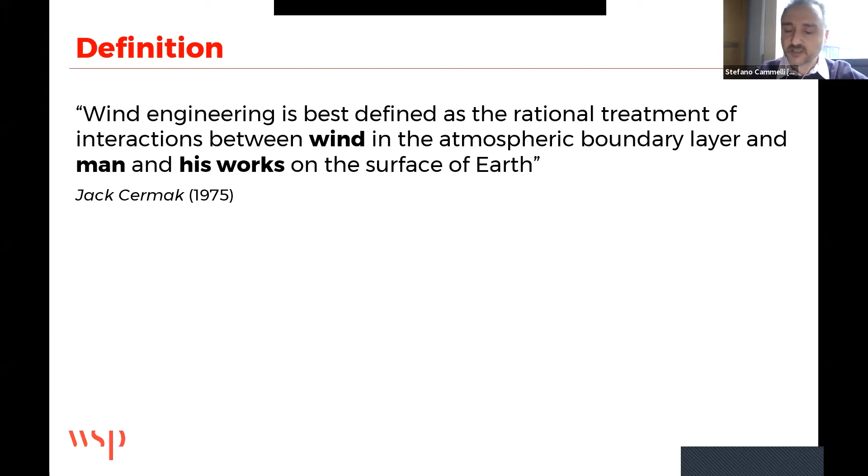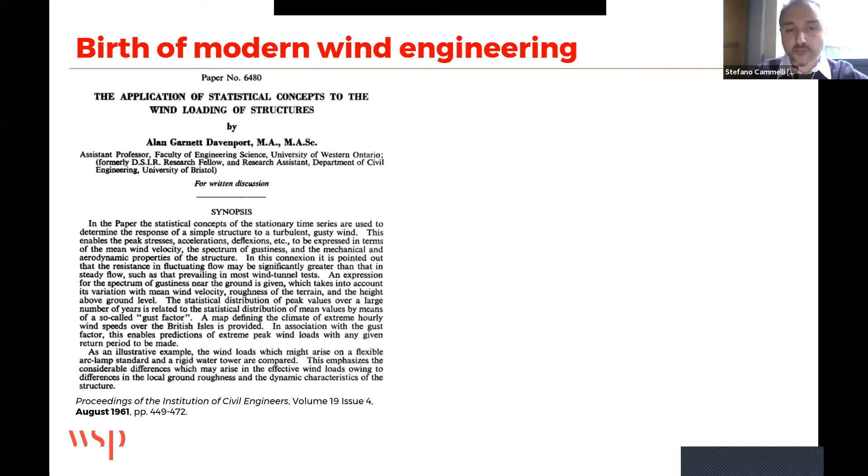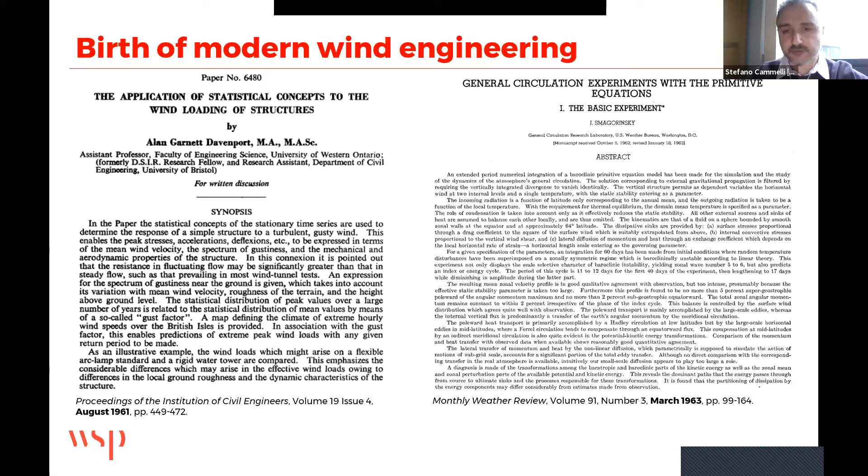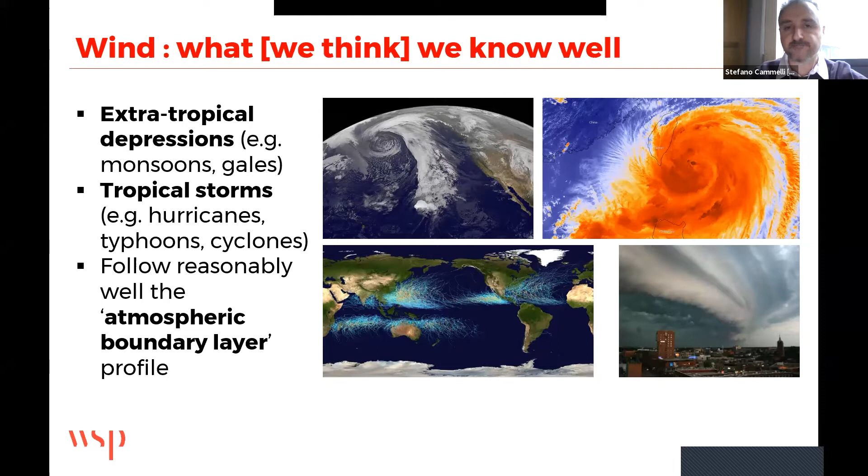Obviously, when you study a new wind climate, or want more understanding of how different mechanisms work together, there's a lot of work needed in developing a detailed wind climate analysis for a specific site.

Different types of mechanism, different types of storms need to be separated. Their probability needs to be treated separately first and then combined back together. And that obviously has an impact on directionality.

As part of the study, parallel wind tunnel testing was commissioned subsequent to the collapse, to gain a more refined understanding of the wind loading on the two structures. Interestingly, the two labs involved ended up with quite large discrepancies in the definition of wind loading overturning moments, for instance—something of the order of 25% apart from each other.

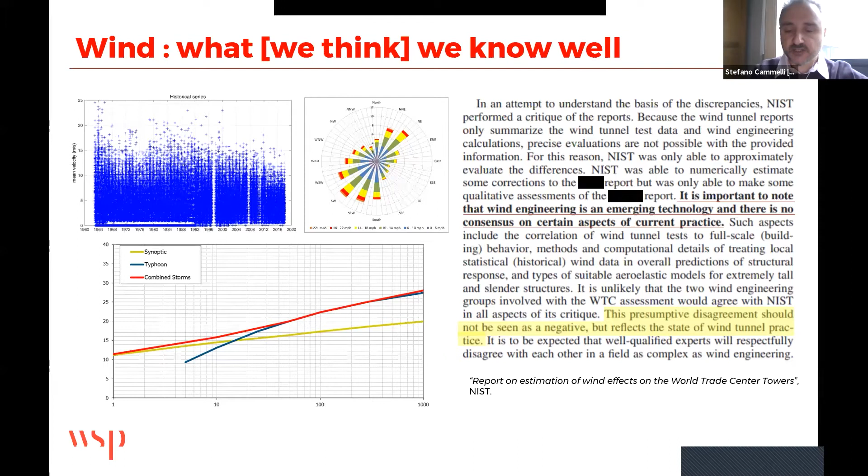If you gather data from weather centers or airports, always be careful to understand where the anemometer was positioned and what type it was—was it a rooftop? Those come with a lot of problems, like proximity effects. Having a good understanding of this is essential.

And if you don't know enough, get as much data from different stations as possible and compare them with each other, because if you intend to rely on this for design purposes, you need to be pretty sure about what you're doing.

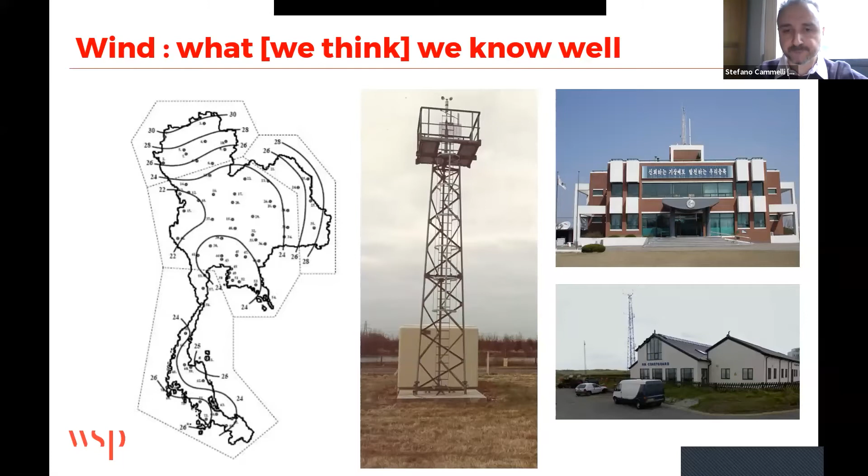Studying the effect of the topography and characteristics of terrain around the site is important. These days this is a little easier because there's a lot of digital information publicly available on land usage. You can use this to characterize the aerodynamic roughness, and then develop an understanding of variation of mean wind speed, intensity of turbulence, length scale, gust speed, you name it, just to get a good understanding of what forces you might expect.

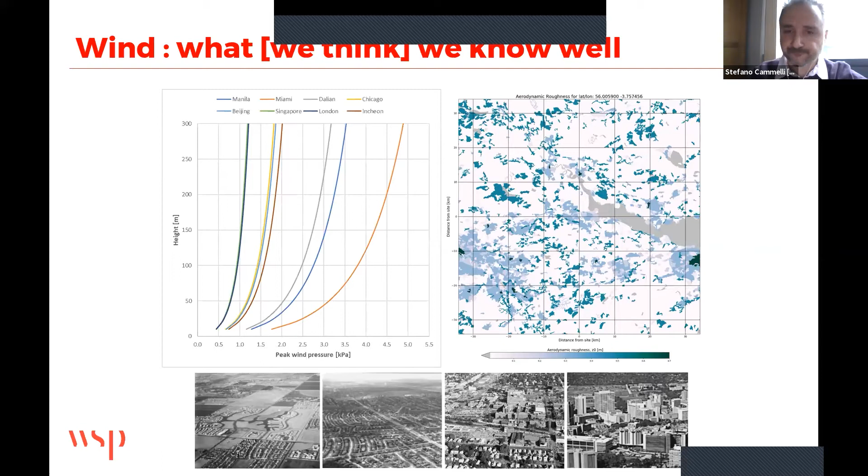As you can see from this slide, if you move between places without hurricanes or typhoons to places with typhoons, you can get a huge increase in pressures, sometimes up to a factor of 4.

It's probably fair to say that the two biggest research centers in the world at the moment in these fields are the ones at the University of Genova in Italy and Western University in Canada.

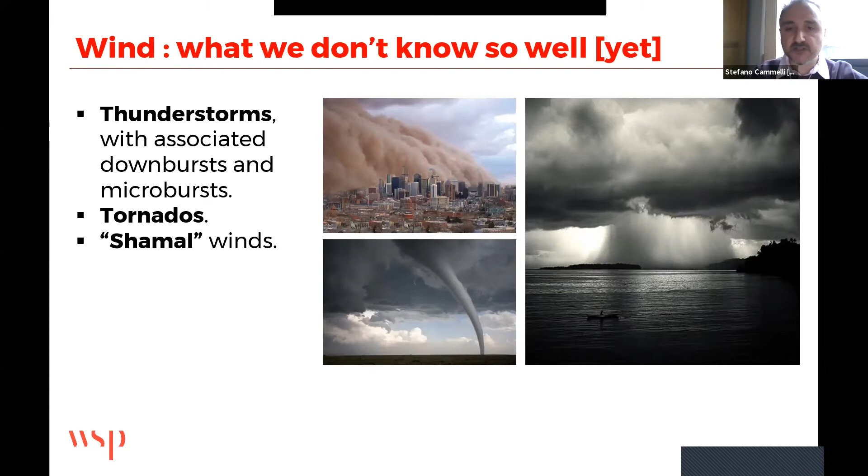As you can see, these events can happen very suddenly. If you couple this with temporary structures, things can become quite tricky, especially if during the design process you started reducing wind speeds to save on material, etc.

The directionality of this event is very difficult to establish. These downbursts can happen at different locations, and therefore the direction the flow is coming from is very much uncertain. This is just because the size of these events is incredibly smaller compared to the size of a large extratropical depression, for instance.

So, forms. Forms is all about architecture—that's our first filter function, if you like. This is quite a nice slide showing the power of three-dimensionality: moving from 2D to 3D forms in the context of aerodynamic force coefficient, in this case drag specifically. As you can see, by promoting three-dimensionality, you can actually gain a lot of reduction in loading.

You might ask yourself, why am I talking about three-dimensionality when we are looking at tall buildings, which are typically tall and slender structures? Well, there are opportunities to promote the dimensionality of the flow, especially by playing and tweaking the top part of the structure, and that is incredibly beneficial in so many ways—I'll come back to this.

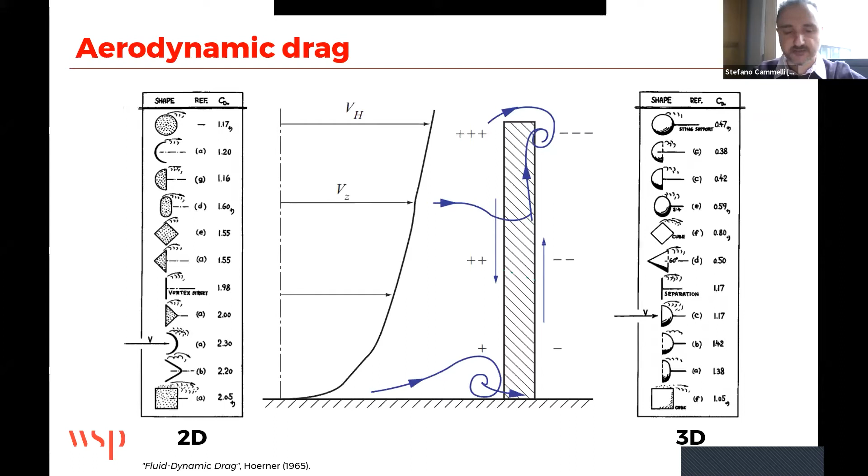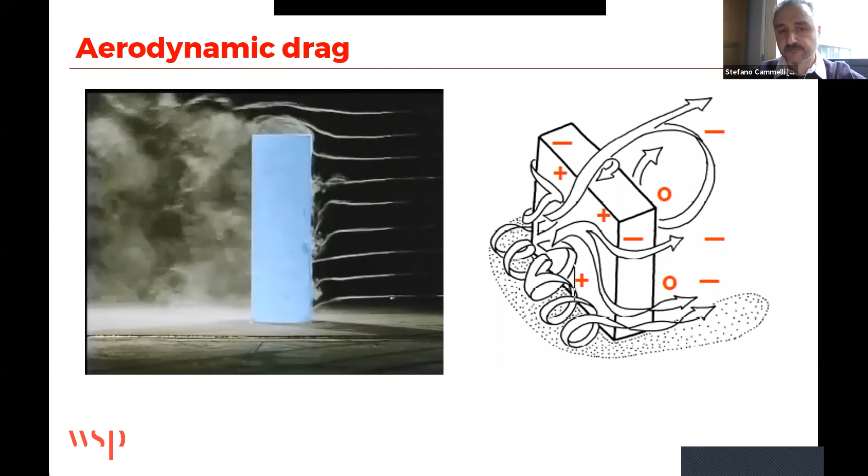But obviously we can't be too obsessed with drag. There are other important factors we need to look at. This slide describes how turbulent flow interacts with prismatic structures. As you can see, the flow—especially at the top third of the building—is generally highly three-dimensional, although, as I said before, this can be enhanced even more.

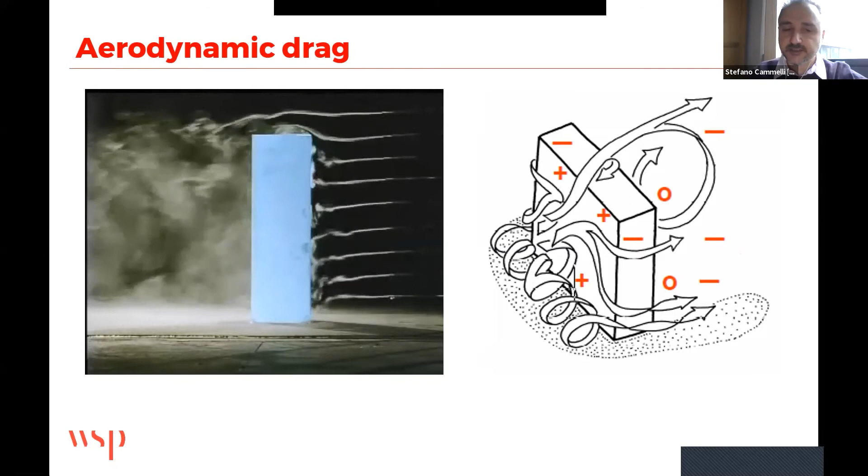Typically what happens from roughly two-thirds of the height down to street level is a downward movement of air, and that's what makes the base around these tall buildings particularly windy. So these are quite challenging things to consider.

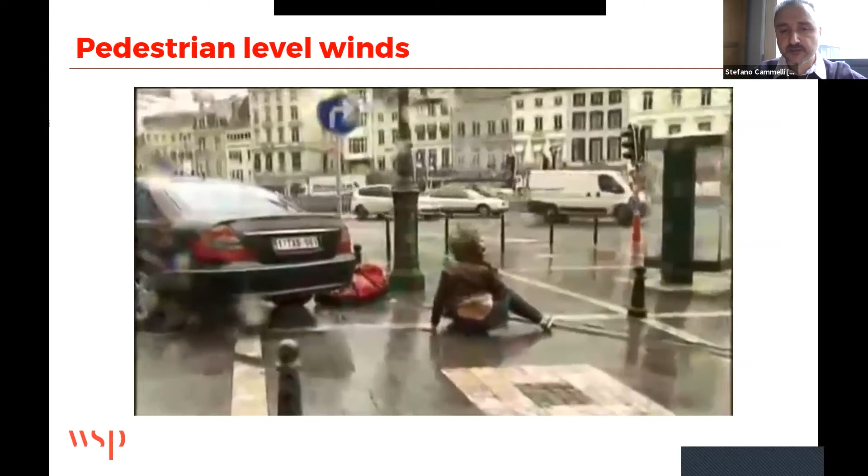Obviously, we are interested in comfort but also safety of pedestrians walking through the cities. There's a tremendous amount of work typically done to make sure that situations like the one shown in this video are very much avoided.

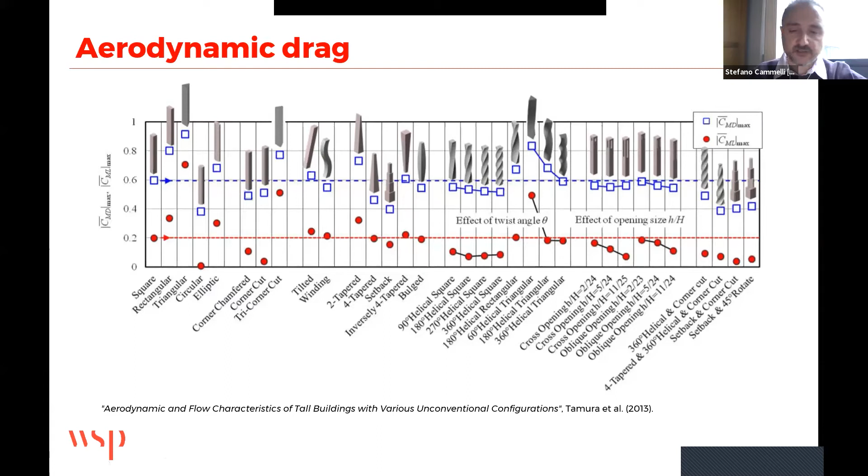This is quite an interesting slide because it shows that corner treatments are quite helpful in reducing the overall drag acting on the structure. What's interesting is that perhaps one of the best performing extrusions is a circular cylinder. Obviously, a circular cylinder comes with other problems attached to it.

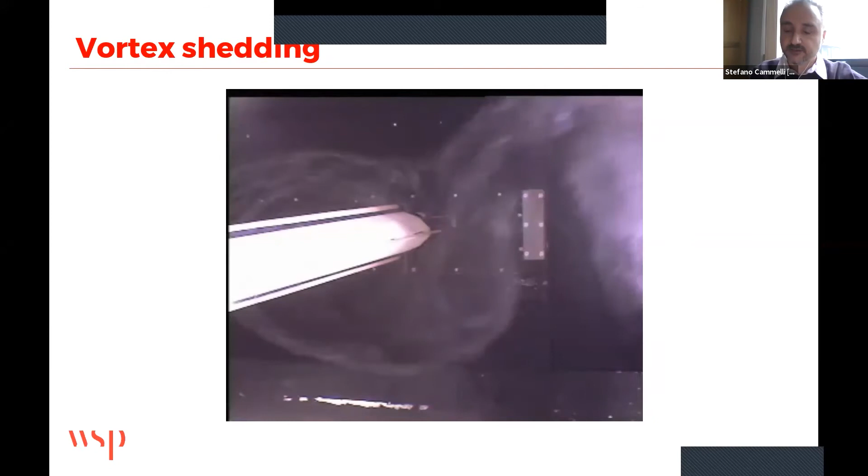So this is the phenomenon that we are typically interested in for tall buildings, which we try to address and tackle. It's called vortex shedding. In this video, wind is moving from left to right, and you have an extrusion of a form spanning across the wind tunnel. As you can see, unsteady vortices are peeled off from this form, happening in an alternating fashion. Because of this, the net effect on the structure is a force that in this video acts up and down, but in the context of a tall building generates lateral forces.

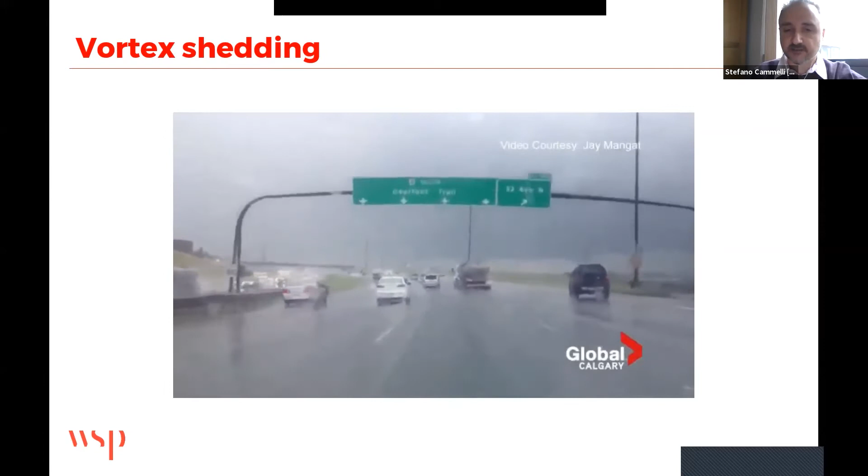Sometimes I show this video and people say, okay, this is just happening in the wind tunnel, it's not happening in reality. This is an example—obviously not a tall building, but a very slender structure. It's a circular hollow section, probably very low damping, very slender. There's a storm going on, perhaps not a big storm, but because of the small cross section of the object, you don't need a lot of speed to get this going. Every time I show this video, I never understand why people keep on driving under this, not least because, as you'll see in a little while, one of the panels will suddenly slide off.

Obviously, when these vortices are shed at a frequency that is relatively close to the frequency of the building, you can have large excitation—it's a little bit like plucking the chord, the string of a guitar. And this is what can sometimes happen, so you look into the wind-induced response.

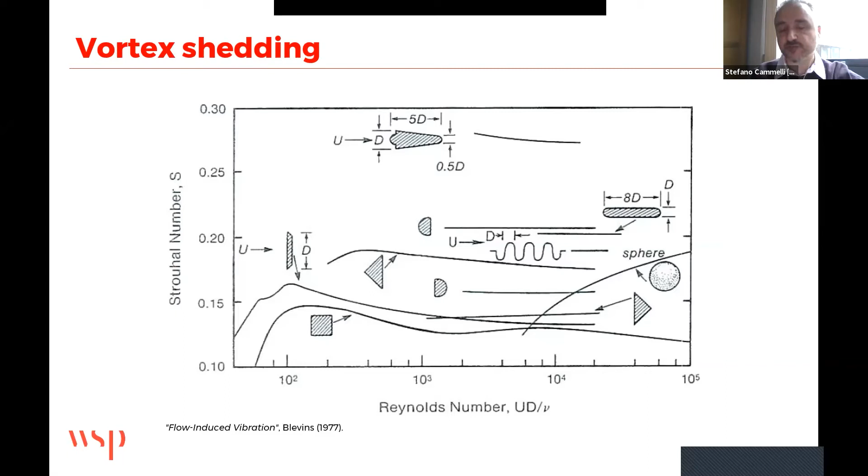Obviously, that video was very much looking at serviceability, but still, these are quite important and should be studied and considered. All shapes produce vortex shedding—you can't really escape that. There's a parameter called the Strouhal number. It's a non-dimensional quantity which effectively tells you how these vortices are shed from a given form. It brings together wind speed, dimension of the cross section of the object, and the frequency at which these vortices are shed.

This is again looking at, in this case, spectra—very much looking at the energy associated with this lateral excitation induced by vortex shedding for different forms. They are plotted versus effectively reduced frequency, but you can think about it in terms of frequency or wind speed, it's just a question of changing the way the data are presented.

As you can see, especially if you look at the first two slides, sometimes small treatment to corners can be incredibly beneficial in reducing the response. Any reduction that you see in this graph on the y-axis translates immediately into a reduction of dynamic excitation on the building, reduction in wind-induced acceleration, etc. So these are quite important.

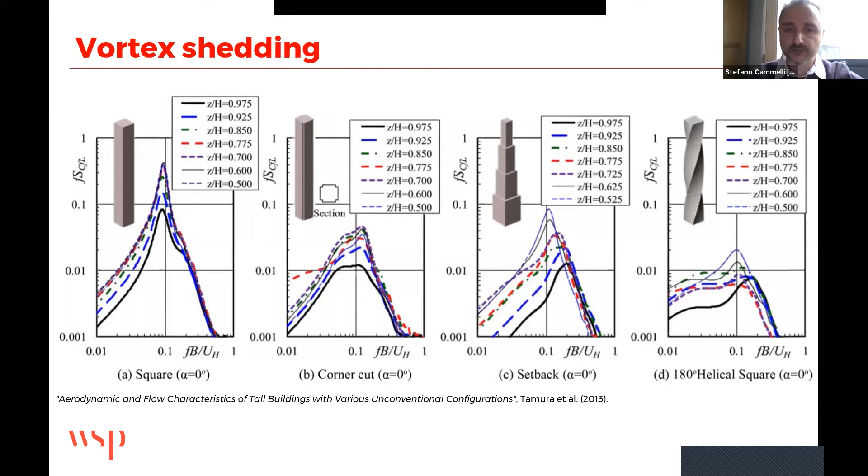This is an example of a building, approximately 330 meters tall, in Beijing. I had the pleasure to work on this a long time ago. Believe it or not, this small corner adjustment—the actual corner modification becomes slightly bigger by the time you go closer to the top—compared to an extruded square form with sharp edges, was able to reduce the overturning moment by about 25%.

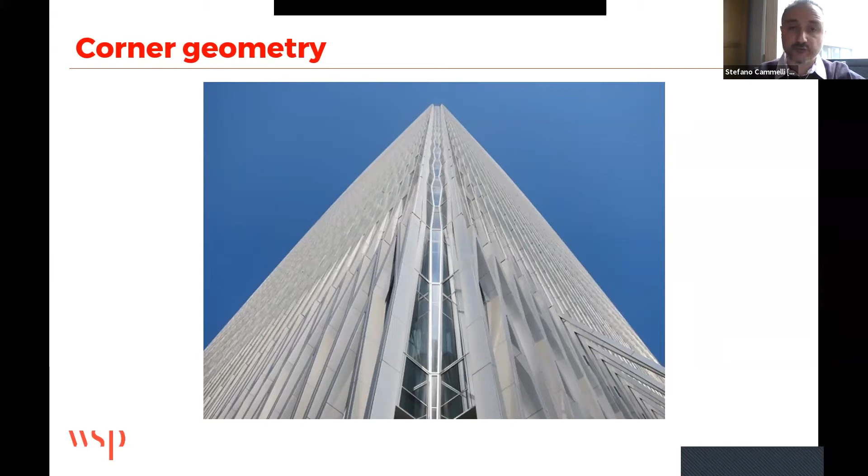So not small numbers. Tapered forms, of course, are very attractive, very important. They give you the opportunity to put the stiffness where it's needed, obviously at the base, and reduce the mass where you don't want it. So that's all great stuff, no problem with that.

Because of the taper, you also reduce the frontal area at the top of the building, another tick. And by changing the cross-section dimension as you move up the tower, you reduce the possibility of creating a well-correlated vortex shedding acting over a large portion of the structure. So those are all positive aspects.

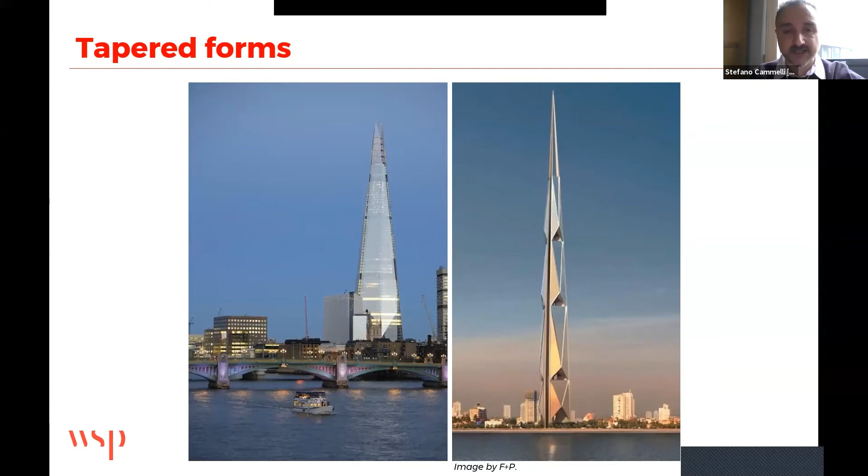One of the slight complications of a taper structure, and I'll come back to this later in the presentation, is that typically a taper form compared to an extrusion tends to have a slightly higher frequency for the first mode, which is great. But at the same time, it tends to bring down the frequency of the second and third order modes. So that can sometimes dynamically be a challenge. But I'll come back to that.

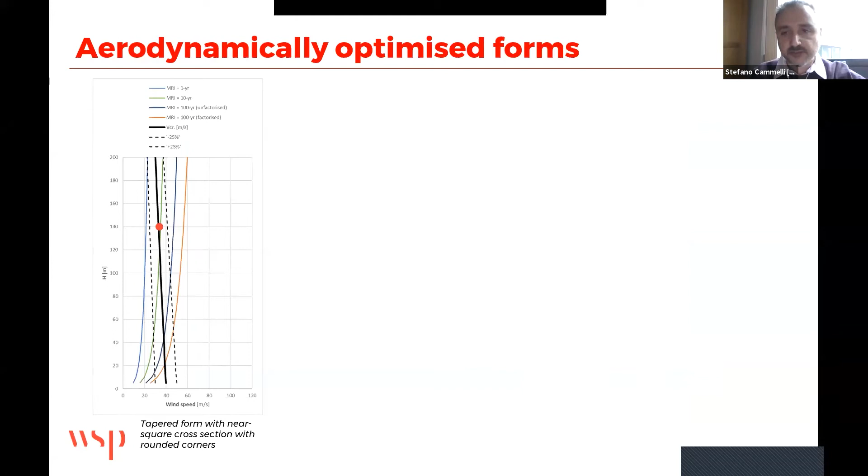So if you want to optimize a form, here's some advice I can give you. You can be as advanced as you like with this. You can start by plotting a series of curves. You study your wind climate model, you have a good understanding of design speed for your site for different return periods, and you can plot those curves - those are the colored ones you can see here. At the same time, you have a rough idea of the shape of the building, what sort of geometry it has - is it a taper form, for instance, what's the cross-section dimension at the base, and so forth. And for each height, you can derive very approximately the critical wind speed for vortex shedding.

Then you can study where these curves are interacting with each other. So you can say, okay, for this building, for this particular condition, for this form, I'm expecting to have some challenges associated with vortex shedding, very much in the context of serviceability, perhaps 10-year return period acceleration. Or perhaps you end up with something telling you that acceleration might not be too badly affected, but ULS loading is perhaps more affected. The power of this is that you can actually test it and change things.

So you can maybe adjust a little bit the footprint of the building. You can perhaps play with the corners. You can perhaps play also with the stiffness of the building. Obviously, this is an exercise that needs to happen almost on day zero, right - when there almost isn't an architect yet, kind of.

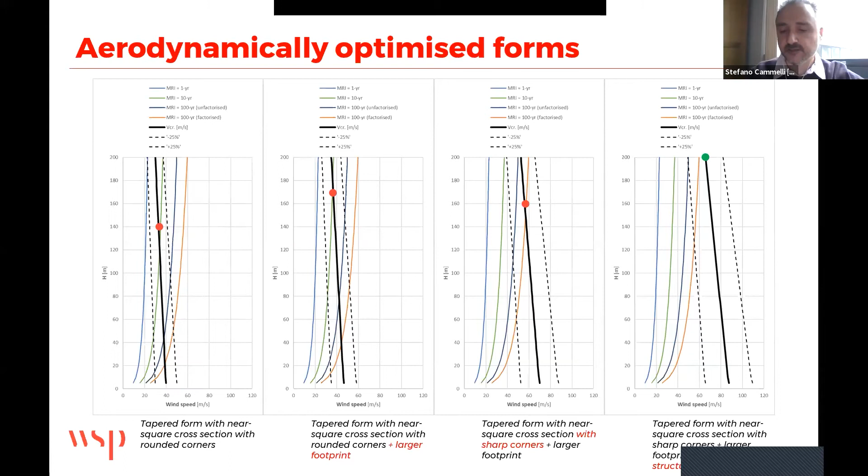And you can end up with the best case scenario where you got rid of the vortex shedding, although you can appreciate that this is very much a non-convex problem, right? So there are different minima here. You can juggle and optimize things differently, but this is always a good starting point. And as I said, it can get as complex as you like - it can be coupled with CFD, and we'll see that in a little while. It can be quite powerful.

This is a tall building, perhaps one of my favorite ones that I had the pleasure to work on. It's a 530-meter tall building in Tianjin, China.

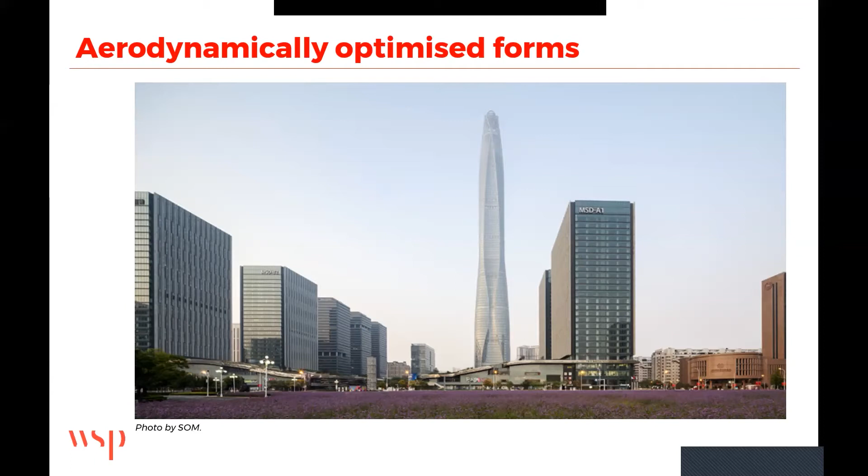This is a highly aerodynamically optimized form. This building has no dampers. It's been developed together with the architects and engineers of the scheme, which were back then SOM. And we took this through an extensive series of wind tunnel testing - a lot of variations of these forms have been tested. The curvature, the way the cross-section changes with height, the nature of the crown, which as you can see is relatively open, relatively transparent to the wind, again promotes the three-dimensionality of the flow. They've all been studied and fine-tuned specifically for this site.

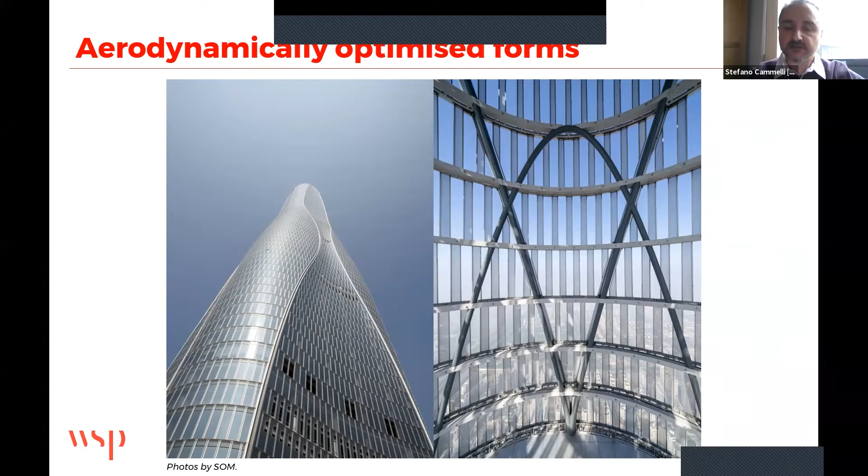So optimum forms need to be site-specific. That's quite important. Sometimes people say, well, what's a perfect form? As I said, it needs to be fine-tuned to the wind characteristics of the site. But in general, if you want something that ticks so many boxes, let's do this.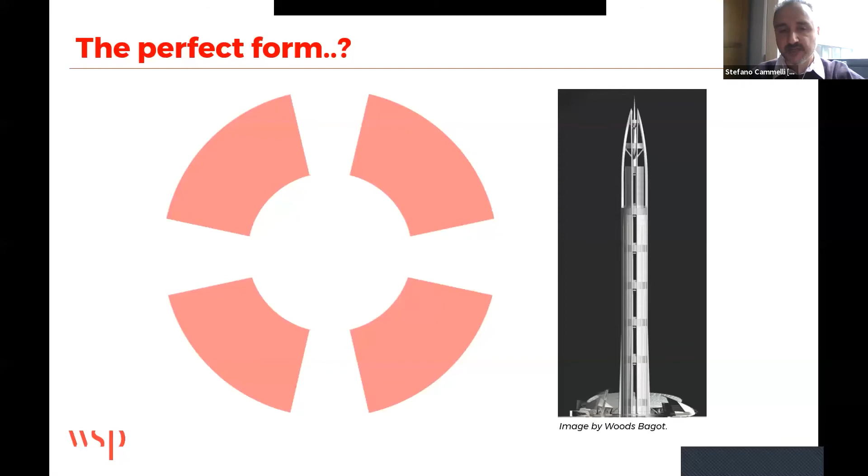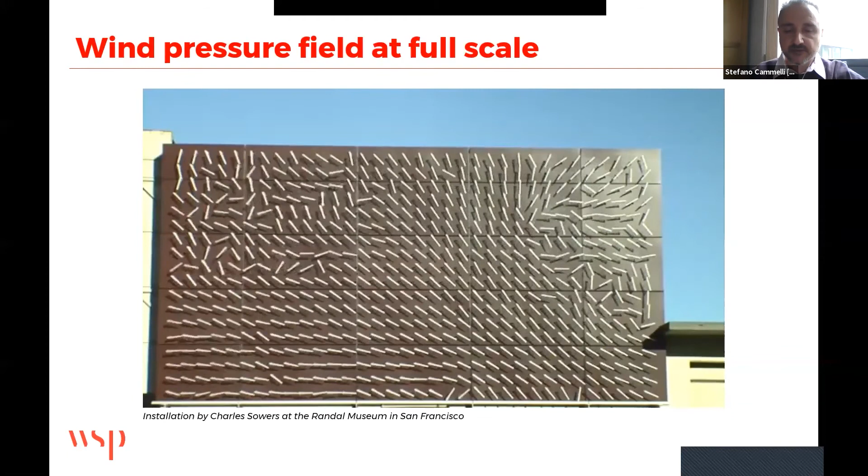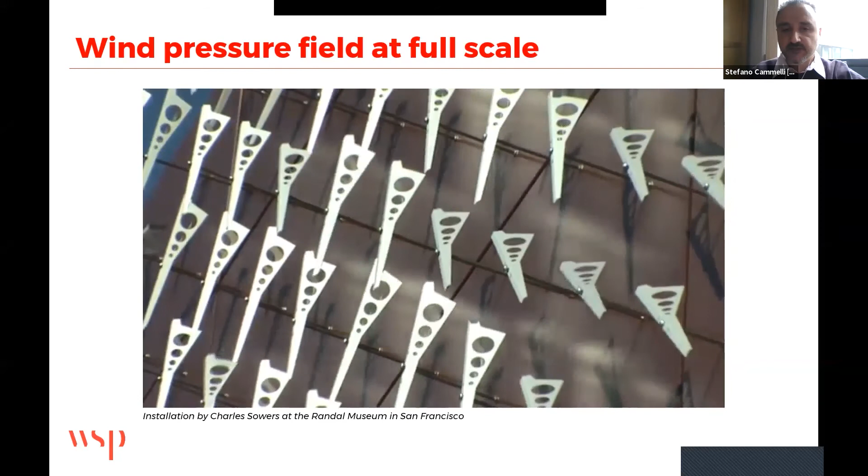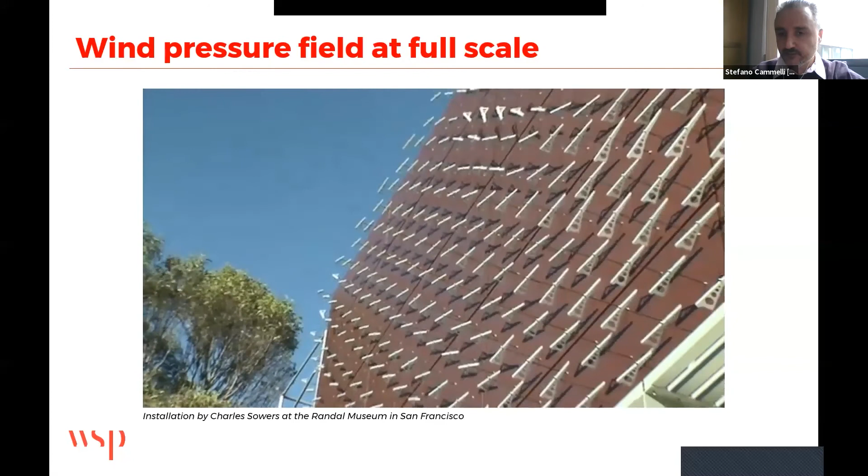Okay. So wind pressures, this is what we are trying to measure in the wind tunnel, trying to resolve numerically in CFD. Obviously, one of the challenges with wind is that it is invisible. So any way we have to actually visualize what's happening, it's a great thing. And this is an artistic installation that was put up in the Randal Museum in San Francisco. They had more than 600 vanes, these tiny little plates which could spin, and you got the opportunity to visualize wind. So this is what actually happens.

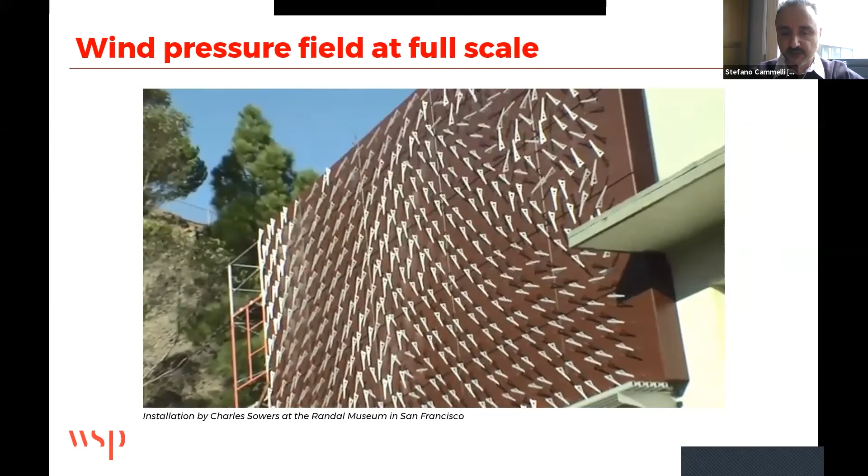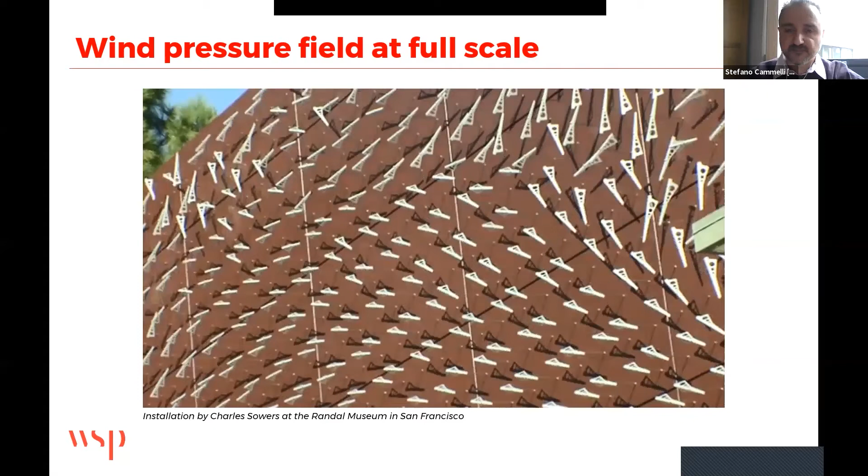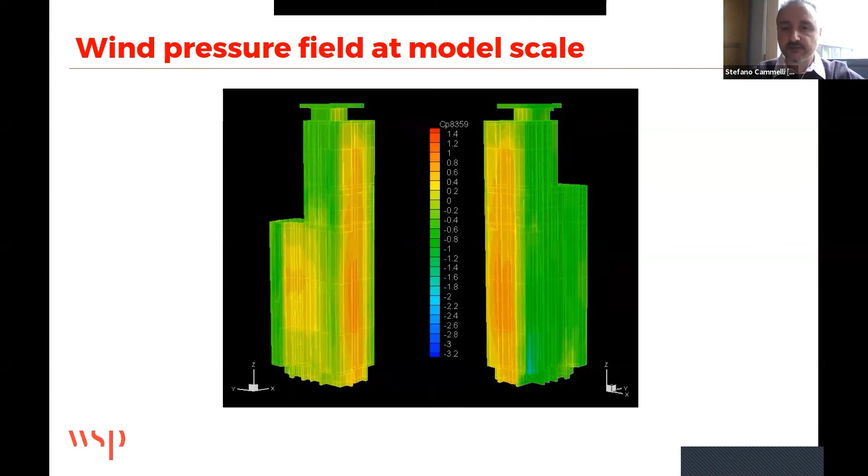basically what's happening typically. Okay, so I know that sometimes people are interested in taking this data from the wind tunnel and plugging them in directly into an FE model. That's a great thing to do, no problem with that at all. But don't forget that by running time history directly from the wind tunnel, obviously it needs to be scaled up to full scale, etc. But by running that sort of simulation, the peak that you get by way of response, as the maximum of that time history, perhaps, well, that's not really the statistical peak. Okay, so there's a fair bit more work that needs to be done, and that can be quite time consuming. Time history is a great thing, but trust me, a little bit more painful than frequency domain.

Wind tunnel testing has been used extensively, as I said, for decades now. There is a lot of technology that you can use, different techniques, force balance, high frequency pressure integration, aeroelastic, you name it. So, you know, these are quite important and extensively used still today.

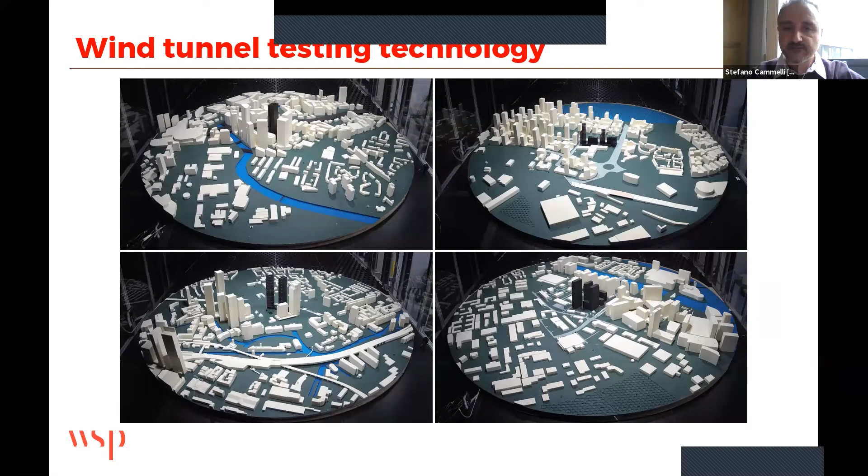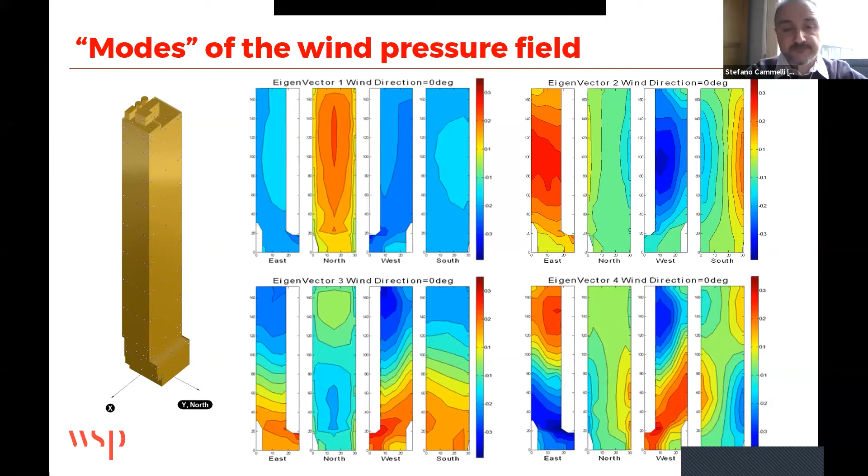You know, for a building of this form, in a relatively isolated condition, I must say, that's probably all you need. Or you can even get away probably with the first 2. So if you're actually interested in time history analysis and you want to reduce the complexity of time history that you're actually working with, POD might be a good tool to use to actually make your life a little bit easier. If you actually are in a built-up environment, things are not that straightforward. You need far more modes to consider, so keep that in mind.

There's a great difference between along-wind and across-wind, especially when looking at it from the point of view of the frequency domain. Along-wind has a distribution of energy associated with excitation that typically decays in a monotonic fashion, while vortex shedding from many forms tends to come with a peak in the response. The closer you get to that peak, without taking into account fluid-structure interaction, the trickier it gets.

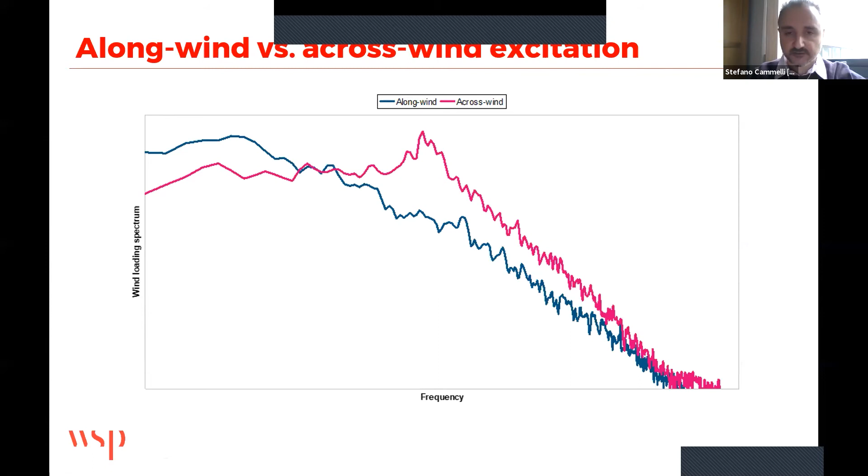So I'll be looking at structures very closely with the structure response at this stage. There are a lot of structural systems that I use these days, and the list is really incredibly long. I must say core plus outrigger is probably one of the most common, to be quite frank with you.

So what you're trying to do here is have, typically, belt trusses bringing together the columns on the perimeter of the building and connecting them with outriggers to the core, so the columns work together with the core. You're trying to improve and minimize the deflection of the building by doing so.

This is a system that's been around for a very long time. It was tried for the first time by Pier Luigi Nervi, an Italian engineer, for a building in Montreal in the 60s. The 60s have been quite special in so many ways, as you can see.

When you go into super tall, super slender buildings, there are these days a lot of other structural systems used and contemplated. Buttressed core is a good example - it's not a coincidence that what are going to be the two tallest buildings in the world have this structural system. And then framed tubes are quite important when you go into the super slender regime.

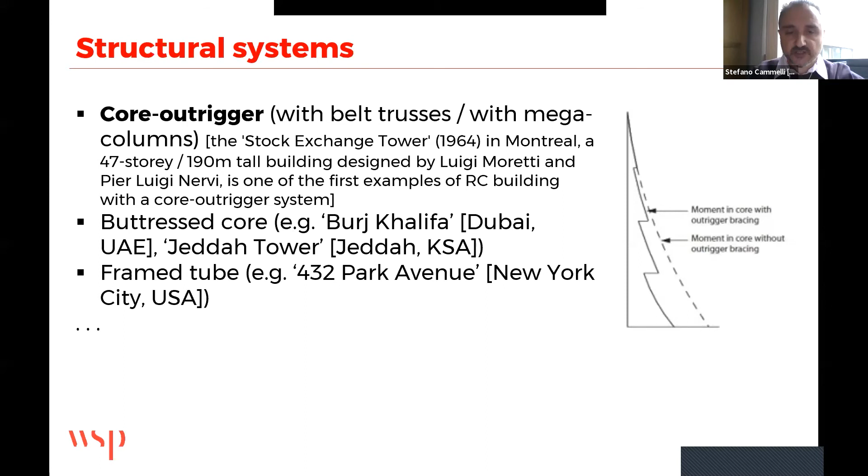Parameters that actually affect and govern the wind-induced dynamic excitation and structure response of tall buildings are obviously inertia, structural frequencies, and damping.

Inertia is very difficult to play with. A reinforced concrete tall building has a bulk density of about 300 kilograms per meter cubed, give or take - so it weighs roughly one third of water. A steel building might be one quarter of water, something of that order. Yes, you can increase the thickness of some floors, perhaps towards the top, to increase the modal mass, etc. Those solutions are definitely possible.

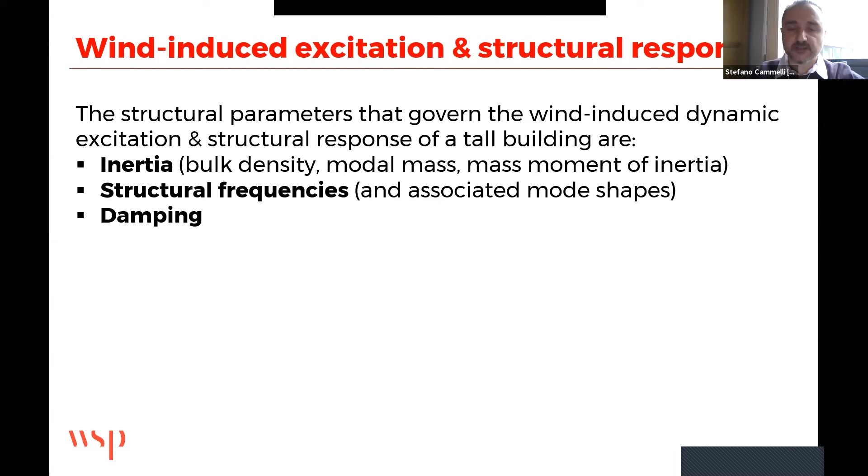In the context of reducing the carbon footprint of the building, that might not be a very smart move. Playing with the form, as we've seen before, is very advantageous. Introducing additional damping might be an interesting way forward in some projects.

This is an important slide. If you work in a country where the code doesn't look directly at ULS speeds, as happens in Europe these days, you need to be mindful of this. If you have strong vortex shedding and your load combination factors have been calibrated assuming the response grows with wind speed squared, while you have strong vortex shedding and you just look at, say, 50-year or 100-year return periods and then multiply those to go to ULS, you might end up with unconservative numbers.

That's something to be very much aware of. This doesn't happen if your code pushes you to go directly to ULS, as happens with the Australian code, the American code, and so forth.

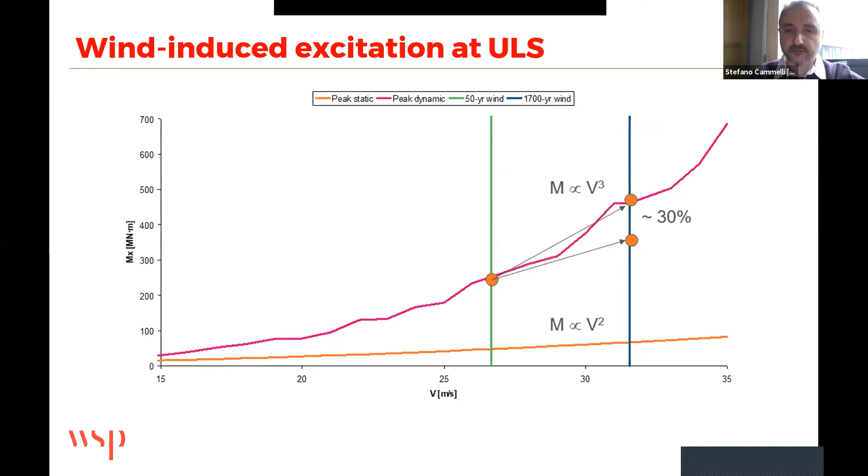High modes of vibration in the context of super tall buildings - I put a couple of slides on this because I mentioned it before and wanted to come back to it. I put side by side these two buildings: one is 600 meters tall, the other 700 meters tall. I've been involved myself with both. The 600 meter one has a very gentle taper, the 700 meter one has a strong taper. The very top of the 700 meter building actually has a large spire, roughly 120 meters tall - it could be a tall building in its own right, sitting on top of another big tall building.

What is interesting to observe is that when we started this 600 meter tall building, we took into account up to mode number 8. But from the point of view of wind-induced peak acceleration, for instance, we could have just analyzed the first 3 fundamental modes of vibration, and we would have ended up with a response which was roughly 97% of the total response. So higher modes play very little in this case.

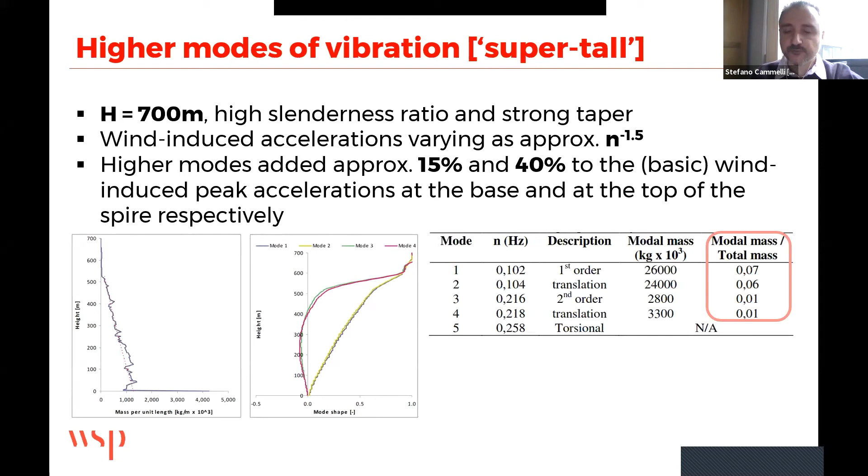It's interesting to observe the difference in the ratio between modal mass and total mass, roughly 20% here and a very small number here. That's because this spire is doing something special. At the base of the spire, which is not the tip of the building, ignoring higher order modes of vibration, you could end up being something like 15% on the non-conservative side. If you look at the very tip of the structure, you could be 40% out. So quite an important consideration for super slender buildings.

If you have a form that is effectively a little bit more organic, perhaps rounded corners, and if you are in a climate where you tend to have hurricanes or typhoons, the possibility of having the second order modes of vibration interact with ULS speeds is actually quite high and very much possible.

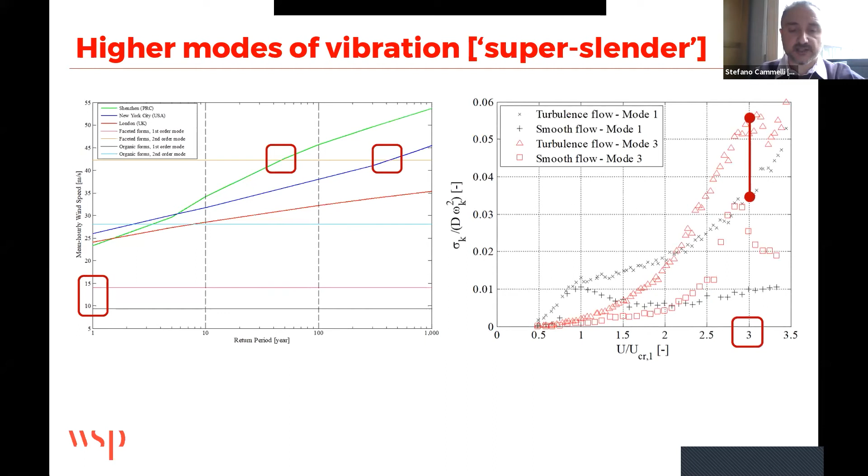Sometimes extra damping is needed on structures. There are different types of devices. Some of those are passive, some are active. I must say that active application in the context of vertical structures, there are not so many outside Japan, probably it's fair to say. There's only one example that's been delivered here in the UK that I'm aware of, of course.

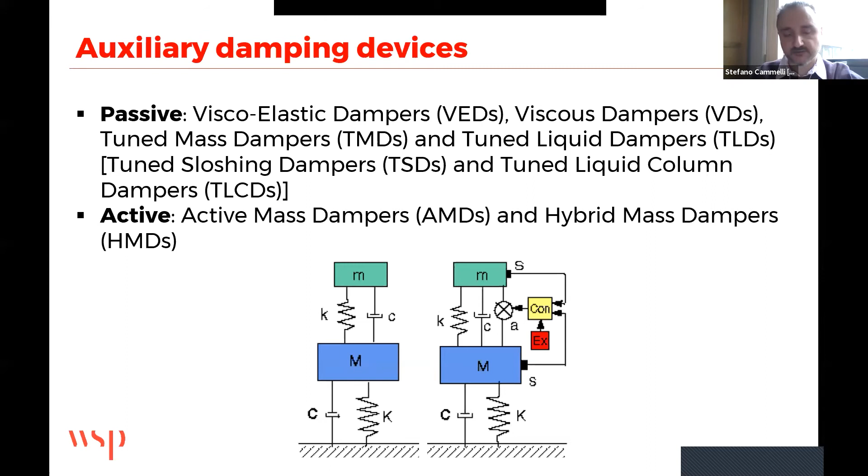Again, in the context of passive devices, there are different ones that can be used. Some of those can be used to take advantage from serviceability all the way to strength design, and some are just typically used to control serviceability, control wind-induced acceleration, for instance.

An example of a passive device is a tuned liquid column damper. This is an example. When you design this, there's quite a lot of work that needs to happen, both from the CFD side of things and experimentally. These devices are not small, they're quite big, they take out a lot of space, no doubt about it, but they're quite simple.

In this particular configuration, their non-linearity is not that great, which is good. As you can see, this movement up and down in the vertical columns induces movement left to right within the horizontal duct, and it's the flow going through this grid system, typically constructed using steel profiles, that creates a dissipation of energy. Very low maintenance, not incredibly expensive, but as I said, they can take out a lot of space.

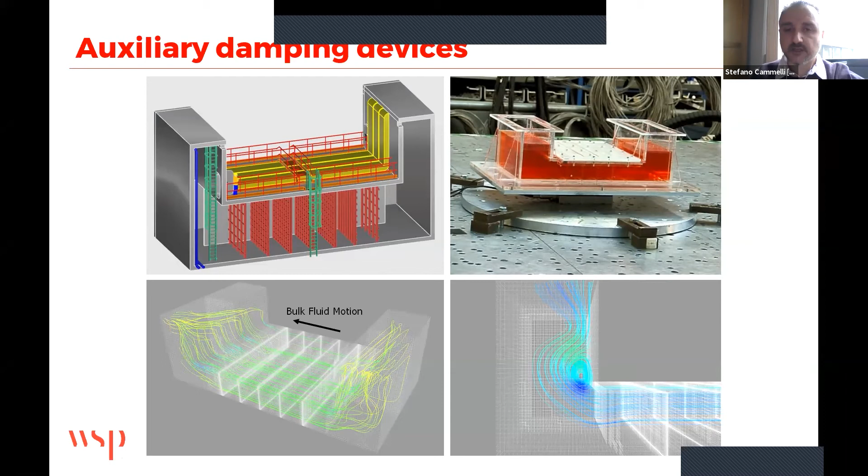Tuned mass damper in the pendulum solution, as you can see from the right hand side of this slide. Again, great devices, but if you have a very long period, these start becoming very, very long, so they take out a lot of space.

In order to avoid that, you need to fold them up once, fold them up twice, and end up with a relatively more complex mechanical arrangement. So you have a frame within a frame within a frame, like you have here in this picture. In this configuration, they can become quite compact and quite effective. But obviously, you would only take this up to control serviceability, not strength design.

Viscoelastic damper, which is what the video on the left-hand side of the slide shows. If you have enough redundancy in the system, and you introduce this throughout the structure, you could end up having perhaps even hundreds of those deployed across a sizable tall building. Then the advantage of this can be taken to the strength design, and therefore you can actually take advantage of those.

Be a little bit careful, because traditionally these have been developed very much to deal with seismic forces, and the duration of those events is relatively small compared to a windstorm. So if you've got a windstorm that could go on for hours, sometimes the performance of this rubber material that is between the steel plates deteriorates slightly with increased temperature due to the friction between these plates. So there are materials that behave better than others.

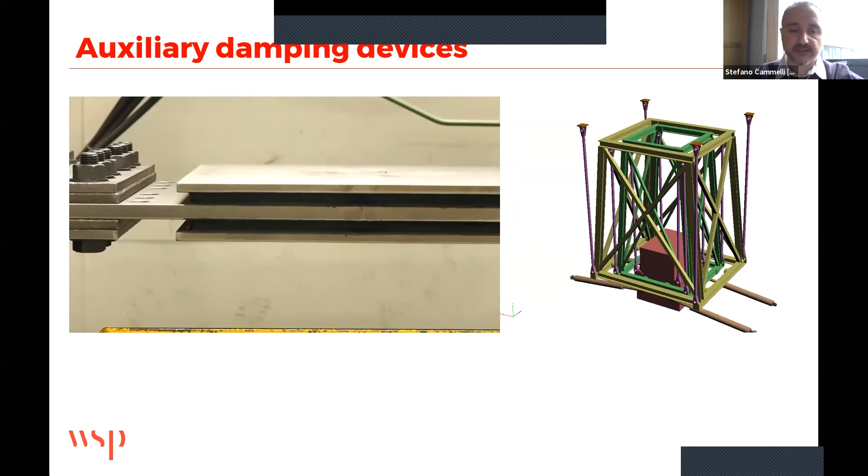Full scale measurements are obviously very important. We are not doing, as a community, enough of them, I must say. There are a lot of challenges around them, because nobody is particularly interested to pay or know much about how this building behaves. But ultimately, I do think that if we want to build better buildings and perhaps reduce the conservatism that I believe personally is still present in what we are doing, we should do a lot more of this.

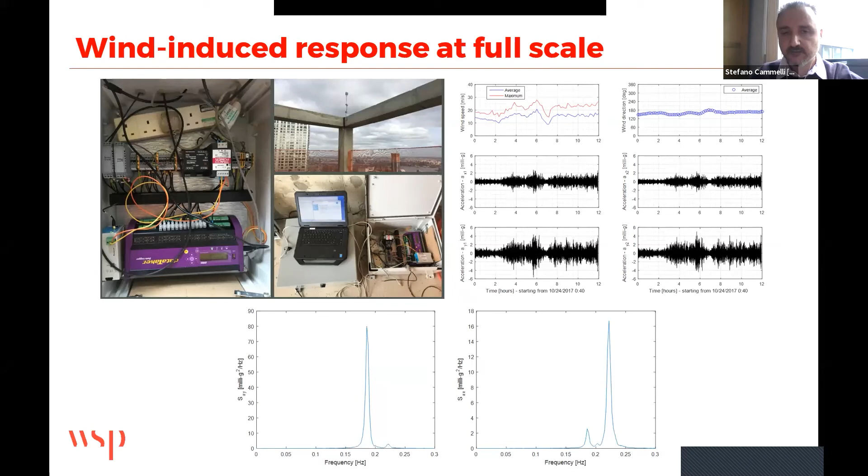This is an example of a full-scale campaign I've been involved with myself. This was a 240-meter tall building. We're measuring different quantities. This was done very much in the context of tuning a damper that was installed at the top of the building. Those are rare opportunities that you have to actually get involved with this type of work.

As you can see, damping does vary a little bit with the peak acceleration. It's not a fixed number. It's actually not increasing all the time. There's a point beyond which it does tend to level off, before other mechanisms come into play, of course.

But these are important, because they're very valuable exercises. They give you the opportunity to take the data that you measure, plug it back into your analytical model that looks at the post-processing of the wind tunnel data, and you can compare and see how you've been doing when you did the prediction with the wind tunnel. And as you can see in this case, prediction between wind tunnel testing and the full scale were, for this specific storm we were looking at, particularly good.

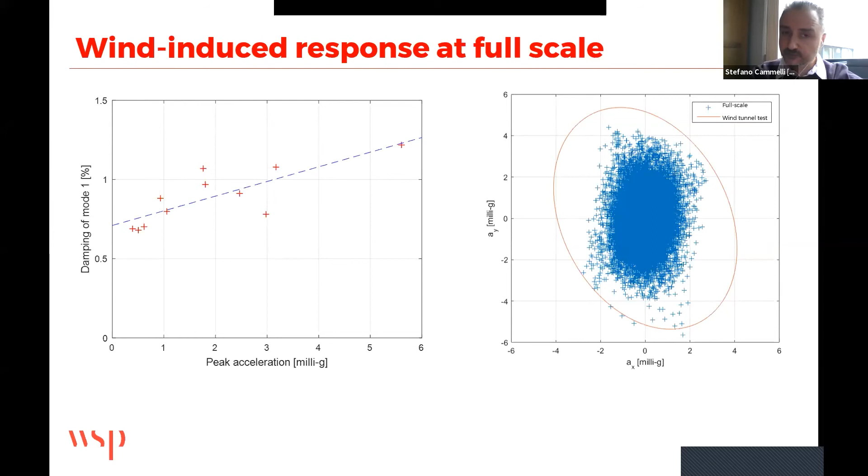So what is next? This is my last few slides, really. For a very long time, we've been treating computational wind engineering and experimental wind engineering very separately. It's fair to say that from that paper I showed you, 1963, it took the best part of 30 years before CFD began to be used in the context of this complex problem of buildings in the built environment. This is simply because the flow is very complex - bluff body aerodynamics, unsteady flow, turbulent flow. It doesn't get any more complicated than that.

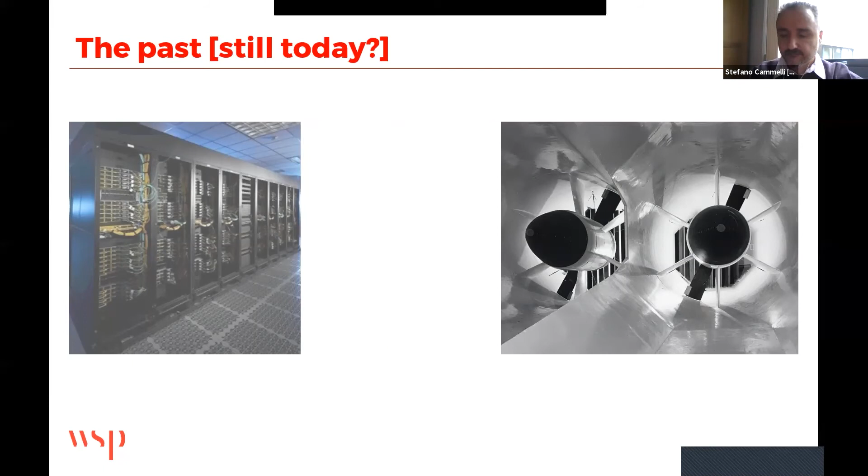So there are reasons for this, but things are changing these days. We are very much breaking down these barriers. We're bringing these two tools together. I think this is probably fair to say where we are in most parts of the industry - the two tools are very much working together. Sometimes it's difficult because you need to be very much on top of both. Not many people can have access to both design tools.

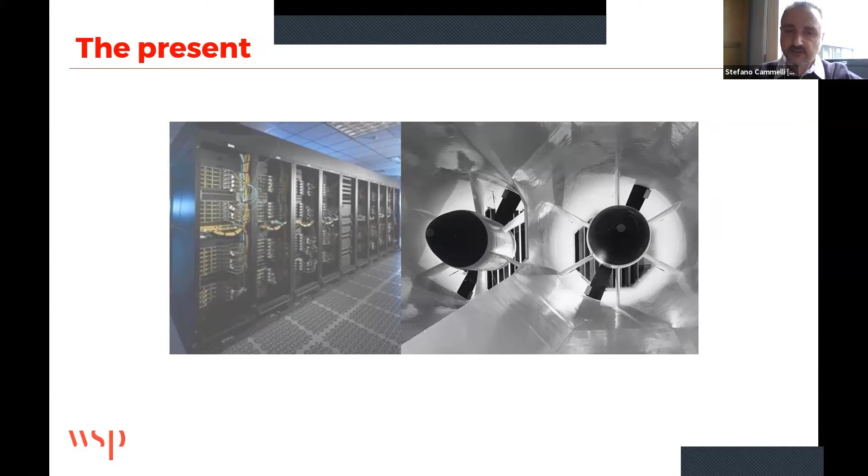But ultimately, where I would like this industry to go is to actually close this loop, really. Think about what happens typically in Formula One - you have a lot of CFD, a lot of wind tunnel testing, and then you have track data. You test how the car performs. Well, we don't seem to be doing enough of that. We do a lot of design, but then we don't test it.

At the end of the day, CFD doesn't need to match the wind tunnel - that's not the purpose of it. The purpose of this is we have two tools. They're very powerful. They have their own pros and cons, no doubt about it. But ultimately, they need to help us design real structures. So that's very important.

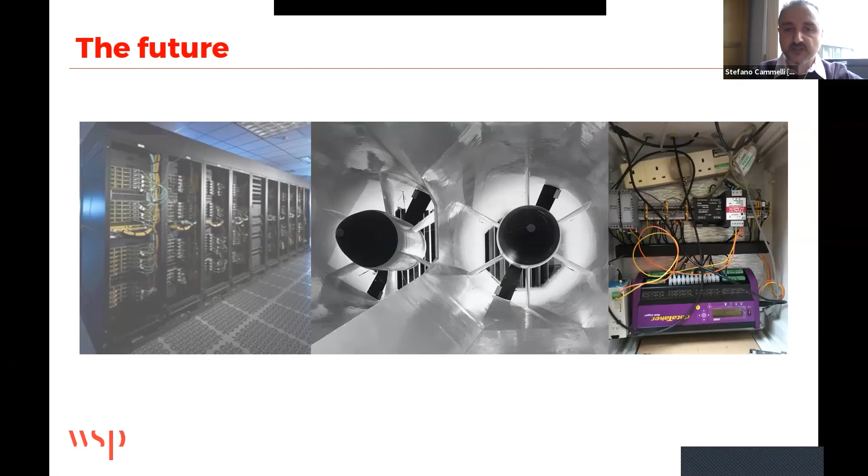So can we push CFD into the solution of structural wind loading? Well, we're making a lot of good progress, I must say. There are different ways of doing this. Obviously, you need to forget about standard CFD RANS simulations - they don't work for this type of application, not at all. You need to push a bit harder. You need to go into, if not full LES, at least hybrid RANS-LES, like DES for instance. And those can actually be quite powerful.

There are different ways of actually simulating the boundary condition. Some people like to create a replica, effectively, of the wind tunnel. It's quite expensive to do that because you've got a lot of cells that are wasted generating the oncoming flow. Some people quite like to use the precursor database method. So similarly, you have this wind tunnel, what people call a virtual wind tunnel - I hate this word, by the way.

And they actually sample the data. They sample the data, store it in a huge database, and use it in the next simulation. So it's kind of nested, if you like. Interesting application - I don't think they're particularly elegant, in my opinion. You can just simulate and store a lot of data, just because you can. It's not an excuse, really.

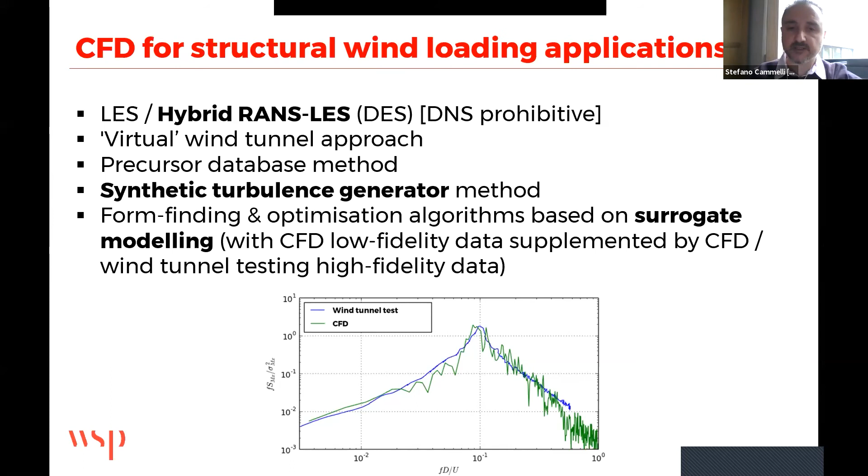They become a lot more challenging, no doubt, when you have an incredibly built-up terrain, but we are making definite progress. This is just a visualization of the tall building, the spectra I presented, just to show you what can be achieved. These are by all means quite complex simulations, and they can also be a little bit expensive.

Some people say, well, these are incredibly more expensive than a wind tunnel test. Well, they are not. Trust me.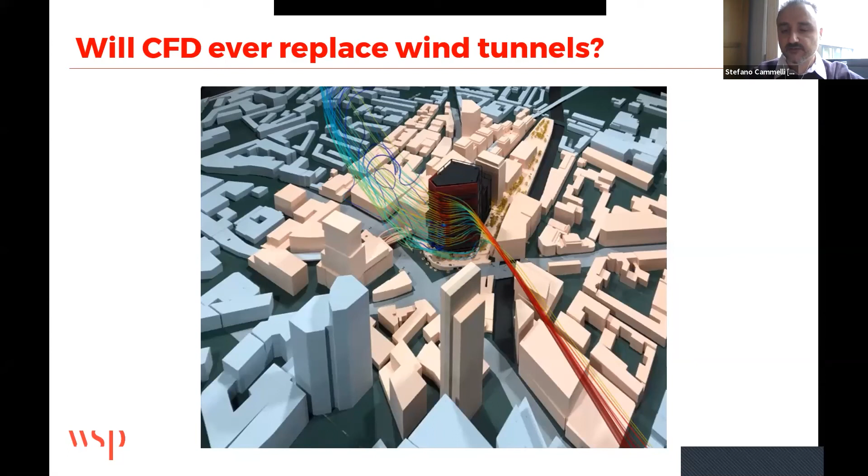Thank you very much, everybody. And if you have any questions, just feel free to type them in.

Thank you, Stefano, for sharing your extensive experience. This kind of knowledge we can acquire from the person who has a lot of experience in wind engineering. I hope we all can learn the importance of the forms influencing the wind response of the building, and also the methods and tools to control the wind response in structural design of tall buildings.

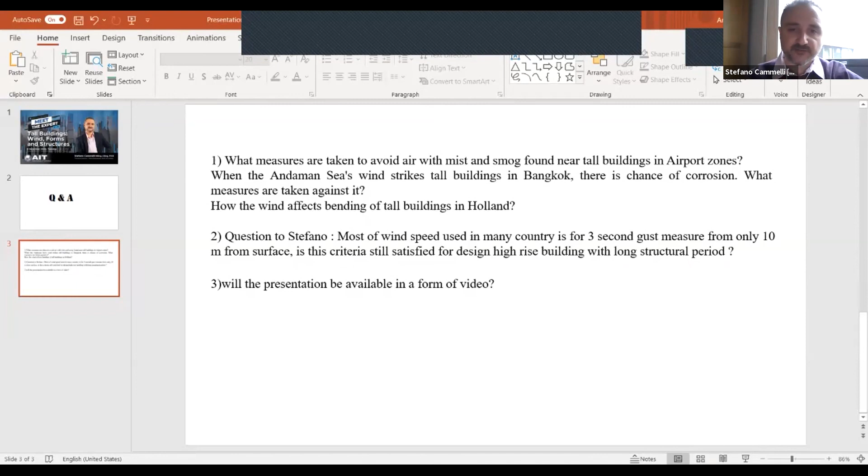Well, it's a good question. All that work in that video I showed you before, where people have been blown down - I think it was a video taken in the Netherlands. During those strong winds, there's obviously a lot of work that takes place these days to make sure those events do not happen. There are other parts of the world where you do tend to have very strong storms, but they don't happen very frequently. Most of the time you have relatively calm winds, and believe it or not, this is the case for Hong Kong.

When you have no typhoons, it's actually relatively calm. One challenge with that calm weather is that within the urban fabric, especially in built-up and densely built-up zones, you can end up with very low air quality - pockets of polluted air trapped between buildings. So the trend is to actually play with the massing of these buildings. This needs to be done, I'm afraid, very much at master plan stage - introduce gaps and voids, but also play with the orientation of buildings. Instead of preventing excessive winds at street level like we do in Europe or North America, in this part of the world you want to promote and maximize that airflow, so you can flush out these pockets of pollution. I'm not sure if that answered the question, but that's my best stab at it.

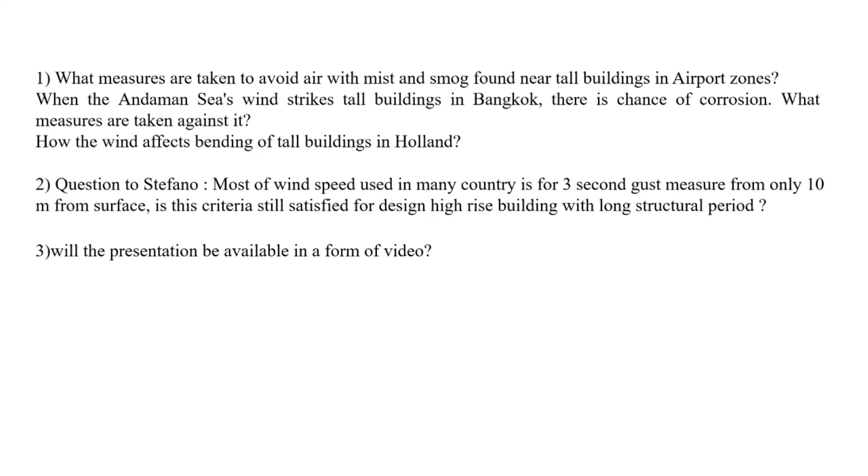As you can probably appreciate, there are not many wind tunnels around the world that do this type of work, at least commercially, and every lab tends to have its own software to post-process and analyze the wind tunnel data. We have, for instance, a software called WSP that is quite versatile in that it's able to interact with different types of outputs from different labs we typically work with on a weekly basis. But those are very much bespoke.

When it comes to CFD, there are obviously a bunch of commercial softwares available. In-house, we don't use them very much. We mostly use open source software like OpenFOAM. We think it's incredibly powerful. It gives you the opportunity, if you want, to even get your hands dirty and change the code yourself, which is quite powerful and helpful when you're trying to resolve something relatively niche that doesn't come as part of the package.

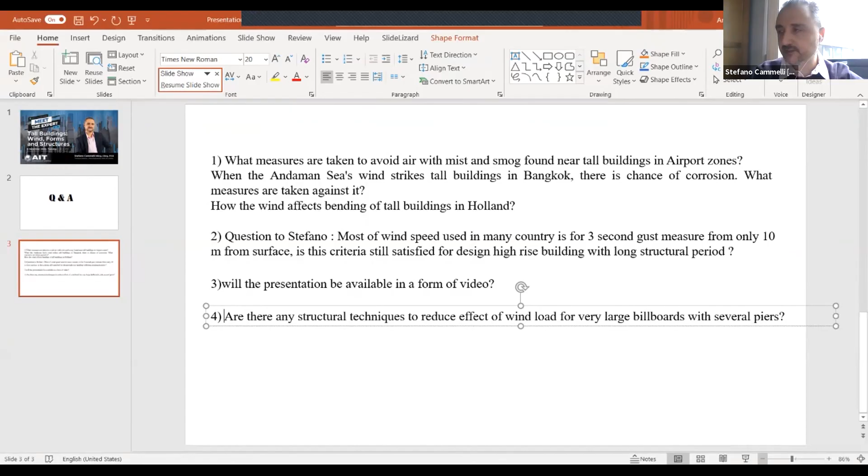All right, so you're talking about billboards. Billboards are very tricky, I must say - I'm not sure where this question is coming from, but billboards are tricky because there are different things you need to consider.

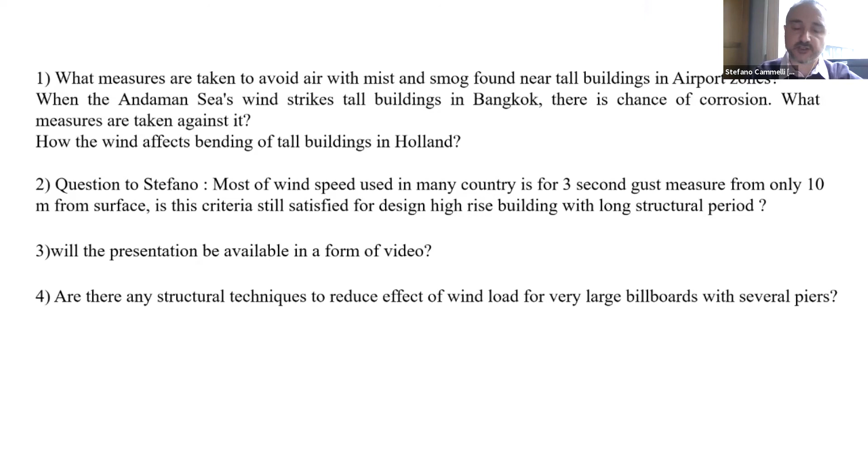You need to first make sure they are aerodynamically stable, which has nothing to do with conventional strength design. You need to make sure they don't suffer from aerodynamic instabilities, which could lead to structural collapse. These are calculations that can be done with some codes - not all codes of practice, but they can definitely be done.

You need to go back to basics a bit, so look for instabilities of a flat plate to start with when you begin your research. And then obviously there's the strength part, especially in the context of torsional excitation.

When you do that, depending on which part of the world you are in, you need to be a little bit careful because these are structures quite close to the ground. And if you work in a part of the world with severe thunderstorms, things can get quite tricky.

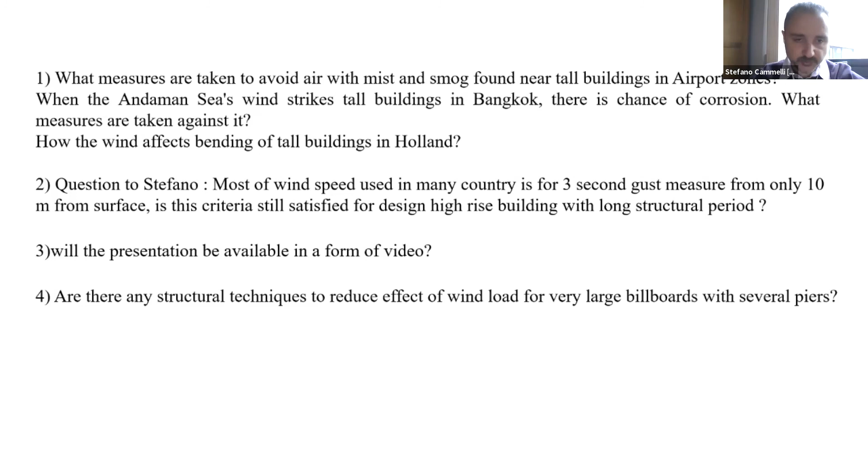If memory serves, the Thai wind code actually has a very good formulation to play with and fine-tune the gust factor to deal with this type of transient event, specifically in the context of billboards. That's a piece of work done by Professor Pennung from AIT, which I believe is probably one of the only pieces of advice in the context of billboards in thunderstorm-driven wind climate that I'm aware of. So you might want to take a look at that as well.